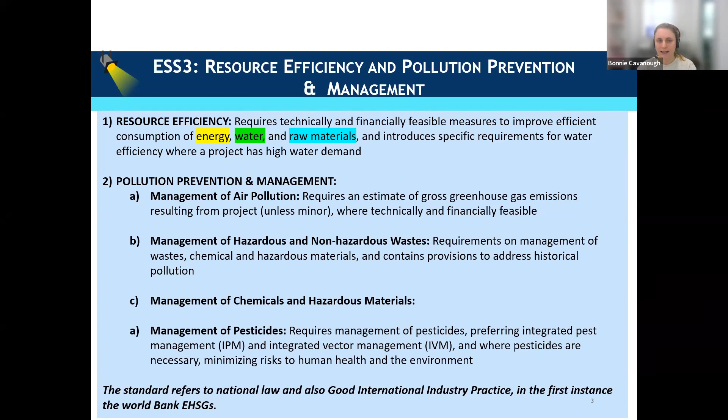I'll go through how you do that in the next section, broken down into resource efficiency - in terms of energy, water, and raw materials - management of air pollution, management of wastes, management of chemicals, and management of pesticides if applicable. ESS3 refers to both national law, good international industry practice, and the World Bank Environmental Health and Safety Guidelines, so there are guiding documents behind our Environmental and Social Framework.

So I'll move on now to the first aspect, which is energy use. This applies to facilities or projects that will consume energy, which many of our projects will do in a limited way. Many projects in the Pacific are quite small, so it might be that your project is funding a new office building. When thinking about building something new, like an office building or whatever your project involves, you should be thinking about how to minimize energy use and maximize resource efficiency.

There's guidance in the World Bank EHS guidelines, and benchmarks provided by industry associations and international organizations. But in a practical sense, think about the scale of your project and what you could possibly do to improve energy efficiency, whether that's installing energy efficient light bulbs, or including solar panels on a rooftop. The World Bank Environmental and Social Framework is meant to be scalable to the level of your project, so when working on smaller projects, think about what is financially feasible and practical, and do whatever you can, but scale it to your project.

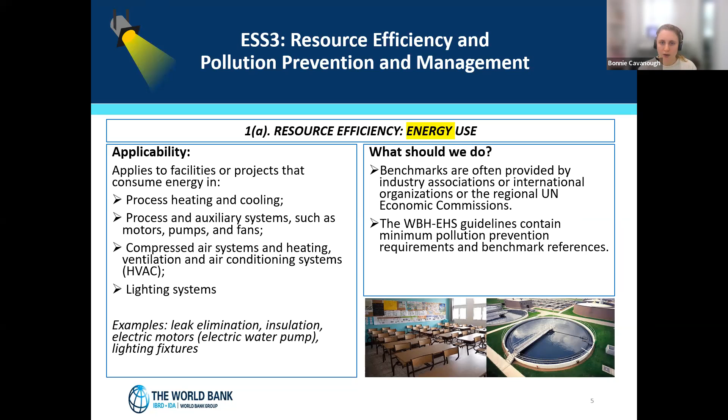I'll move on now to water use. For projects with significant use of water, there is a requirement to assess potential cumulative impacts of water use upon communities, other users, and the environment.

That means if you're working on the preparation of a project where you'll be using a lot of water, for example an agricultural project where you'll be installing irrigation systems, you need to consider the impact of that water use upon the community during your environmental assessment, and identify what is a sustainable amount of water to be using. You also need to consider whether your project will have an impact on water quality, and in a practical sense minimize those impacts by reducing runoff, controlling pollutant sources, and potentially treating contaminated water before it's discharged off site.

One practical example is a project we're funding under ESF where we're building slaughter blocks, or abattoirs. During preparation, we've had to assess the potential impacts on water quality, such as managing animal waste and the high nutrient runoff that comes from a slaughter site when hosing down blood and other material. We've had to propose how we'll manage those risks. That's really how you apply ESS3 practically — considering how you'll manage and minimize risks to water quality. There's also the opportunity to consider resource efficiency measures.

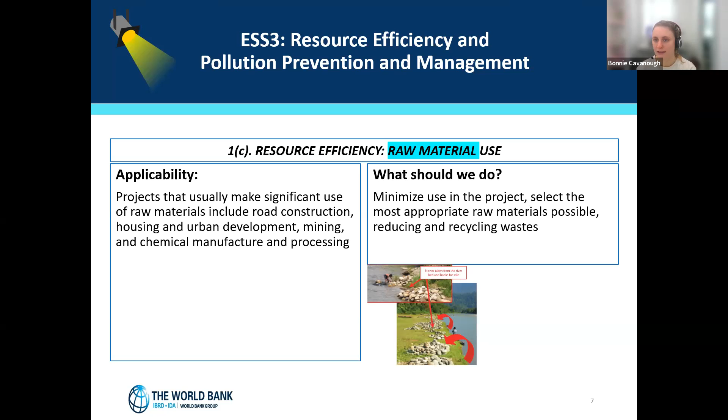Under ESS3, you are required to assess the source of the raw materials you'll be using. That means making sure you're procuring stone from a permitted quarry, from a legal source, and it's good to think about sustainable sourcing of materials. We shouldn't be sourcing sand that's been mined from beaches — that isn't a sustainable source. Where possible, we should avoid unsustainable material sources and make sure we're sourcing from legal sources, ensuring wood has been legally sourced and cut down, not from an illegal operation.

Moving on to air pollution.

Consider this one really for our projects. The applicability is, consider when you're building new offices or facilities, consider energy efficiency, try and reduce your emissions that way - energy efficient lighting, potentially installation of renewable energy sources. Make sure you are thinking about waste management. If you're procuring materials or technology, consider how you're going to dispose of that technology at the end of its life, and also try and select materials that contain less pollutants, so lead-free paints, non-mercury bulbs, that sort of thing.

Moving on now, there is a requirement under Environmental and Social Standard 3 to estimate greenhouse gas emissions for your project at the preparation stage. So ESS 3 does ask you to estimate how much GHG your project will emit over its lifetime. Now, there are some exceptions, and in many cases in the Pacific, we don't need to complete this estimation. So if you're working on a project that will have diverse and small sources of emissions, for example any kind of community-driven infrastructure project with small grants going to various communities doing small things, you won't necessarily need to estimate the greenhouse gas emissions. Or if you're doing a project where emissions are unlikely to be significant, for example social development projects, child nutrition, education projects, there won't be a requirement to estimate your emissions. It also allows that you only need to do this where it is technically and financially feasible.

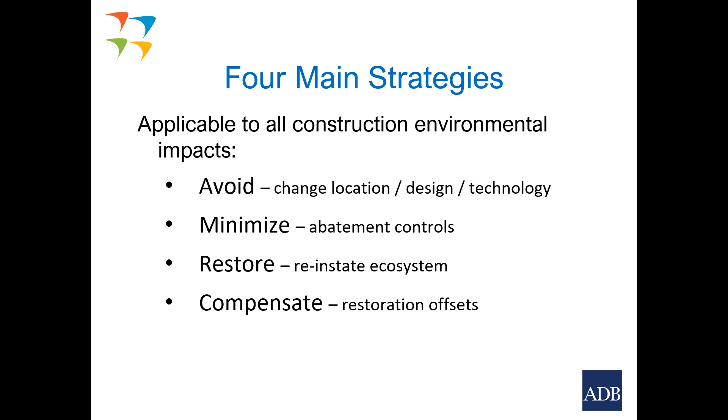And then finally, if you can't restore, then there's compensation. This particularly refers to any loss of biodiversity, ecological impacts, and also pollution and waste. These are the four key strategies that make up the mitigation hierarchy. Firstly, avoid, if you can, that's the best way to mitigate. Minimize. If you can't minimize, then restore, and certainly compensation also.

So now looking at water pollution, what are some of the sources? Surface and groundwater can be impacted by hydrocarbons, pollution from fuels and lubricating oils used in construction projects, silt from normal excavation, and cement from concrete batching plants, which can raise the pH of water and be dangerous to surface water quality. Sewage from construction camps is another source of water pollution. Polluted groundwater discharge can happen when pollution goes through the soil into the groundwater, causing pollution of water bodies a distance away from where construction is ongoing. Chemicals used during construction are another source of pollution, and as mentioned before, invasive species brought in from other countries can cause significant effects on biodiversity.

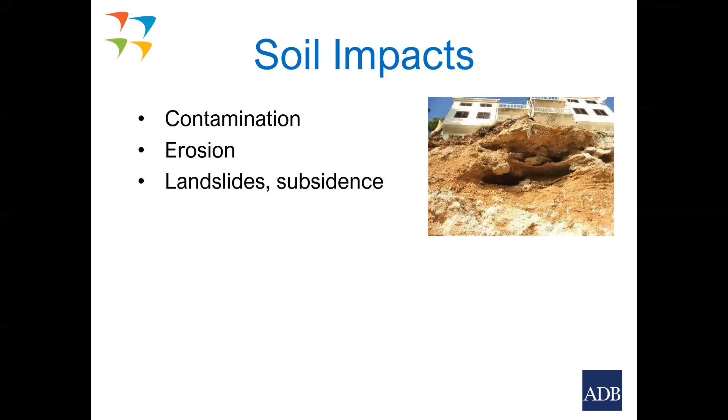Soil impacts. Soil contamination is one of the highest risks, and this can occur through chemicals and oils, or through landslides caused by construction activities, and heavy vehicle traffic on temporary construction site roads. Wherever there are steep slopes, there's a possibility of landslides due to water or overloading. These things must be considered in your environmental management plans, or your construction environmental management plans.

So it needs to be controlled - you need to make sure the contractor is controlled when these sorts of things happen, that there is control to clean that up, and again to reinstate if the community is affected through their polluted water supply. The contractor will be required to compensate by providing fresh water from somewhere else. So these are common sorts of things in construction if it's not properly mitigated and not properly controlled.

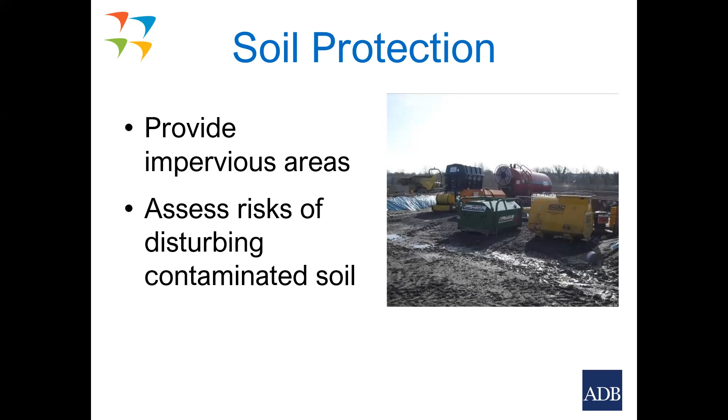Soil erosion. Exposed soil. This is a classic problem in construction. Exposed soil on a gradient has a high risk of erosion, and it can be a major problem in construction activities, resulting in the loss of fertile soil, the loss of habitats, pollution of water bodies, and landslides.

It can be minimized by the use of vegetation mats used to stabilize loose rock, check dams or gabions, which reduce the velocity and intensity of the eroding media, which in this case is water.

Here are some other measures for soil protection during construction: minimizing, preventing and reducing erosion by minimizing the length of the slopes, relocating any temporary structures that may cause issues, such as relocating a cofferdam to a better situation that will reduce sedimentation, minimizing the grade and maximizing flow resistance of any channels, and using wide channels rather than V channels to reduce the velocity.

Use armor, as you can see in the right-hand picture there, using armor reinforcements such as gabions and geotech fabric to strengthen the banks, and then conserve topsoil and vegetation, or restore the vegetation.

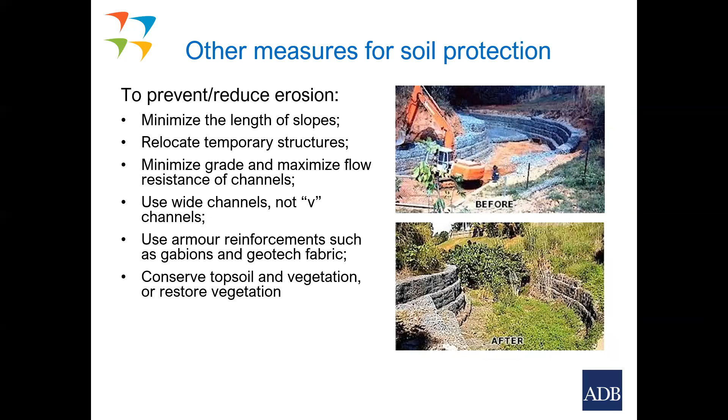You can see in the bottom picture, after those measures have been put in during the construction phase, the vegetation is allowed to grow back. By putting in those gabion measures, you've protected the banks and the surrounding environment from significant erosion that would otherwise occur if that strengthening and protection didn't happen.

As the construction proceeds, as the road proceeds, revegetate as soon as possible, have progressive stabilization of the earthworks, and most importantly, around the site, wherever there is runoff, there should be runoff channels leading to sediment retention ponds.

In the case of concrete batching, there should be chemical treatment to reduce the pH.

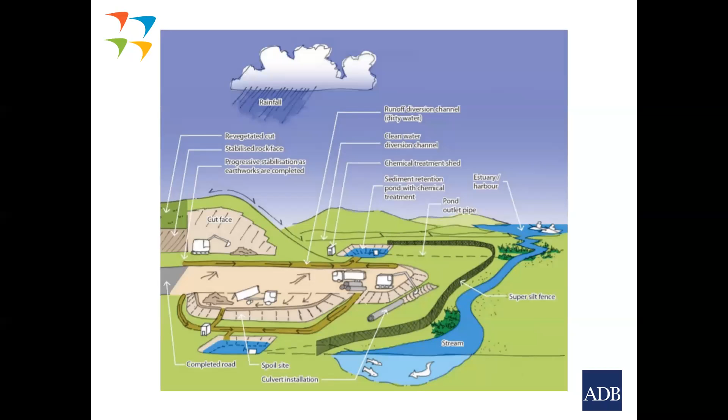We would like to see in a contractor's environmental management plan something akin to this kind of diagram, just to demonstrate exactly what measures he's got in place, that he's assessed the area, assessed the vulnerability of the area where he's building, and taken appropriate measures specific to that particular area of construction. So this is the kind of detail we would like to see in construction environmental management plans when it comes to pollution control in a construction project.

Many countries are taking a very hard line on management and disposal of construction waste, particularly hazardous waste and contaminated waste. A waste management plan, as part of a construction environmental management plan, must deal with the waste handling and disposal of all of these different waste streams.

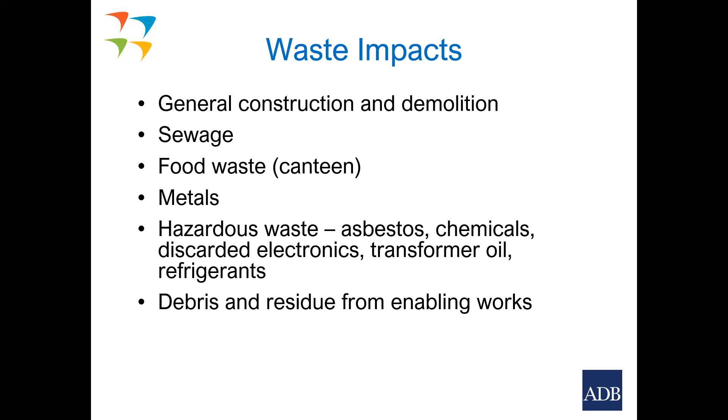The key thing about waste management is that there needs to be planning in advance, early on during the preparation of the construction environmental management plan. There needs to be detailed planning as to how these various waste streams are going to be dealt with, written very carefully in the plan. For those of us who review contractors' environmental management plans, it's very important that this management is written into their plan very specifically, so you can see just how they're going to manage their waste.

Otherwise, if they start their construction work without having an approved management plan in place, they would just do it ad hoc, and it would be a disaster. So it's very important that the contractor has thought very carefully about how he's going to deal with his various waste streams on site.

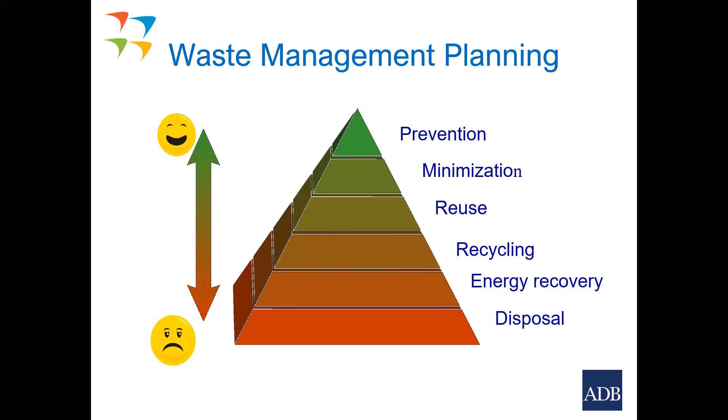So in summary, when looking at management of pollution control and waste management, the four mitigation strategies should be used to limit construction impacts: avoidance, minimization, restoration, and compensation.

Employ internationally recognized good construction practices, and all contractors should be aware of those. But we often find that contractors in the Pacific Islands think they're an easy touch, and they don't have the same stringent legal requirements that they do in more developed countries like Australia and New Zealand. The contractors know full well that they can't do this sort of thing, but when it comes to the Pacific Islands. My experience is that contractors think they can just get away with not spending money on dealing with their waste and pollution control.

Very important that they are called to account to ensure good international practices are required. Pollution control, water pollution, soil impacts, and then waste management planning, the hierarchy.

So in summary, that's just a very short practical presentation on some of the issues relating to construction management of waste construction management and pollution control. So if anybody has any questions, please fire away.

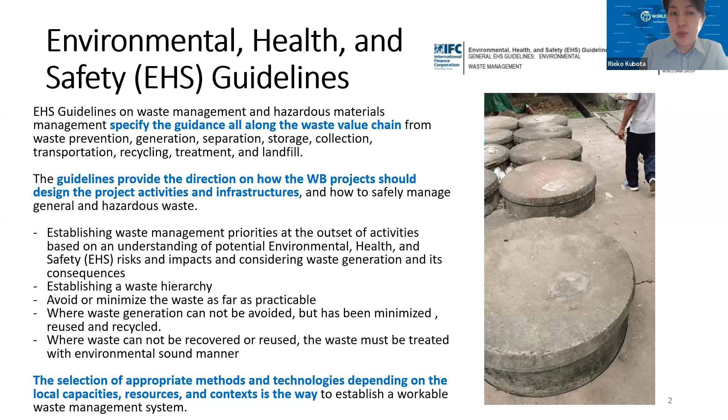Okay, so the EHS guideline touches on both general and hazardous waste, but it covers quite extensively how to treat hazardous waste in World Bank projects, just because hazardous waste has a bigger negative impact when it's not safely treated or disposed of. That's why hazardous waste is always a priority issue, and ensuring separation from non-hazardous waste is really essential when considering the waste management system in World Bank projects.

And when we consider hazardous waste management, the basic principle is that we want to prevent that hazardous waste as much as possible.

We try to understand the potential impacts and risks associated with the management of any generated hazardous waste during its complete life cycle. For example, some construction activities use a lot of paint, which is considered hazardous waste because it contains a lot of chemicals. If it's drained into water, it can pollute the groundwater as well. So we need to assess such risks during the entire life cycle of the product.

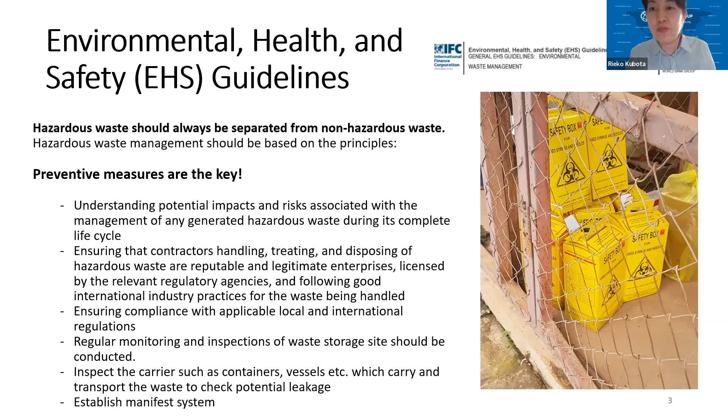Okay, Afira, before I hand over to Bradley, can I just quickly show you one case study that I've done for the project? Yes, please. Okay, let me just do this very, very quickly.

When I prepare waste management projects, in all the World Bank project steps, we follow the same process. We usually conduct a waste composition analysis to understand what kind of waste is actually generated in the areas where we are going to implement the project. This is a very standard survey that we conduct, and we identify what kind of waste we need to deal with, if there is any hazardous waste generated in the area, and so on.

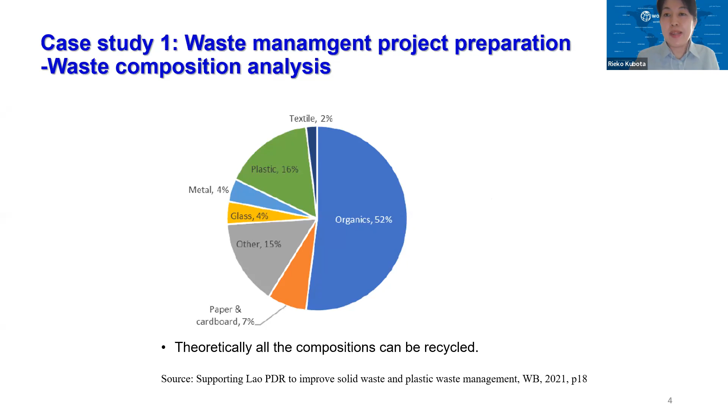In the project I worked on in Laos recently, much of the waste is organic waste - food waste, garden waste, trees and leaves, plants, and so forth. We identified very few hazardous items; it wasn't really reflected in this graph, it's under others. So we find this kind of waste composition at the very beginning.

And then we also conduct a waste stream analysis, where we identify what volume of waste we would need to deal with, and in what way it is generated. In our example, it was generated as mixed waste.

So it was not separated, it was just coming in one bag as mixed waste. So we thought it would be better to have a sorting or recycling plant, so that manually and also automatically, mechanically, we can sort out all the recyclable waste, the compost waste, and the hazardous waste at that sorting plant. We do this technical design of the sorting plant afterwards, so that we can minimize the waste that goes into the landfill and try to accord with the waste hierarchy.

So what we are really trying to do in a technical design of the waste management project is minimize the waste that goes into the landfill, and maximize the waste that goes into that recycling process that will eventually be sold to those recyclers or informal waste pickers.

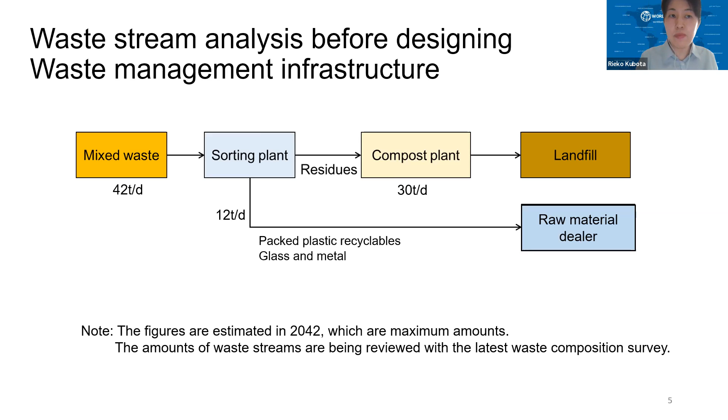So this is just a typical design of the sorting center. After accepting the waste at the recycling center, we go through all these different mechanical processes so that it can be sorted out and brought into the recycling process once again, for material recycling or energy recovery and so on. This is the kind of technical design we usually do for the waste management project.

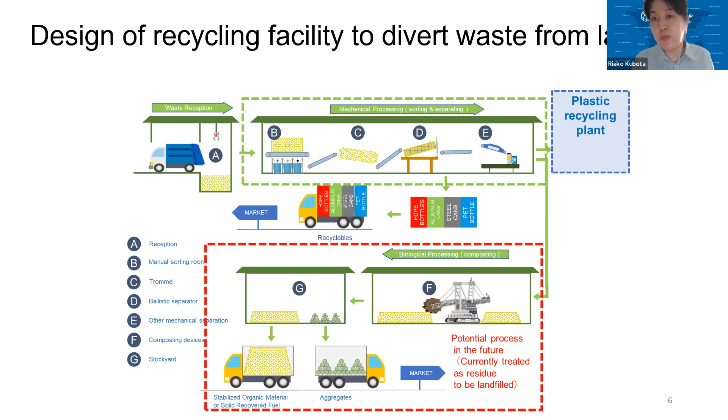And for all the residual waste that arises from this process, we need to design an environmentally sound landfill site. So we do have different technical designs to make sure we don't pollute the soil, groundwater, surface water, and also the surrounding agricultural lands.

This is something we collaborate on very strongly with the ESF team, who is much more familiar with the ESS 3 standard and other standards prepared by the World Bank and other international standards. We also try our best to relocate existing waste, which is usually open dump, but try to safely manage and close those open dumps so that we can make new landfill sites that dispose of waste in a much safer manner.

We also usually attach a leachate treatment facility. Leachate is the wastewater coming out from the waste, usually seeping out from the bottom of the landfill, and it's quite hazardous because it's concentrated wastewater coming from all the types of waste put inside that landfill. This is again required in the EHS guideline, to have a proper wastewater management system at the landfill site.

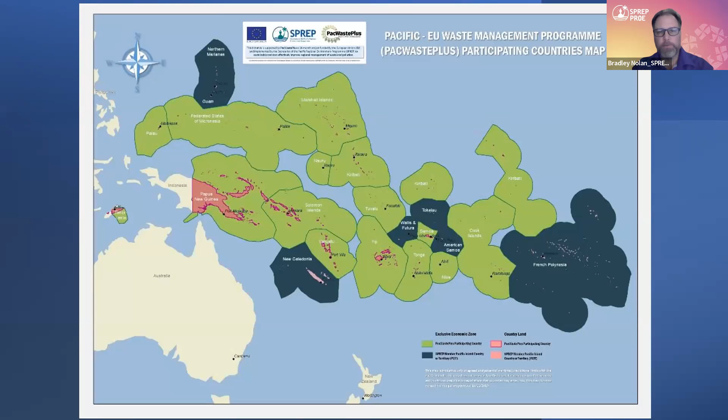For those unfamiliar with myself and the work of PacWastePlus, we're a European Union funded project across 14 countries in the Pacific and Timor-Leste. We're implementing projects looking at hazardous waste, asbestos, e-waste, healthcare and solid waste across those areas you can see, and a bit of wastewater through our partnership with SPC. We've got 4 key result areas: data and information education, legislative assistance and frameworks, on-ground activities and best practice implementation of works, and capacity building. So covering the whole gamut of project activities that can occur throughout the entire Pacific. You'll see, far to the left, Timor-Leste also included, even though they're sitting outside of the Pacific Ocean.

The reality is the work we've heard Bonnie, Alan and Rieko talk about is the core ESS considerations for waste management work. The focus on what am I about to do, what waste am I about to create, and is there a way to reduce, avoid, and mitigate any of those responses, is vitally important in any activity we do. We really want to make sure that not only direct but perverse impacts from project activities are dealt with.

I know this is a World Bank presentation, but I thought it might be useful to quickly reflect on the ESS process thinking that SPREP implements for all of its projects, regardless of thematic area, whether waste, climate, or oceans, islands and ecosystems, with the intent of recognising that there may well be other impacts to waste-based work that might influence decisions that need to be made.

So the typical assessment process looking at consequence and likelihood is applied across our ESS assessments. When we look at our assessments, we consider both principles and safeguards: human rights, gender equality, child protection, climate change impacts, biodiversity impacts, and waste management principles are all considered.

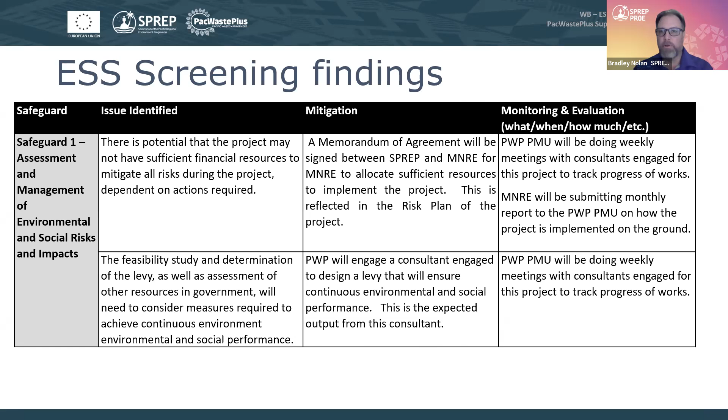So there's complex thinking that needs to go into these systems past just, are we producing waste, are we capturing it, are we minimizing it? We need to make sure the system and intervention designed actually provides the best overall outcome across everything. This presentation series is all about ESS3, but remembering the 3 indicates there's a 1 and a 2, and other considerations as well. So it's good to focus on minimizing waste management impacts, but remembering those other ESS considerations may influence a design scope change on our projects to make sure all outcomes are balanced.

Similarly, how does the refund work? Where can people go? What are the health and safety implications on the structure of that system based on the activity undertaken? How can we ensure effective operation and monitoring? All these considerations are captured inside that screening and help build a strong, robust system so that our intervention, seeking a sustainable financed solution for this waste, also has stronger community sustainability.

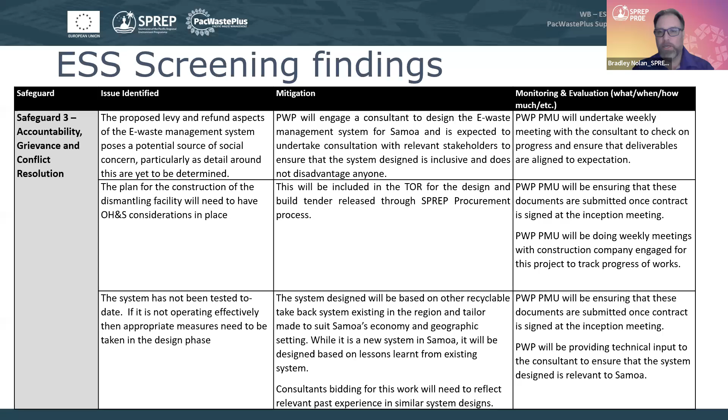So I know I've moved through that relatively quickly and only provided one example, but in the interest of time, I think that's the appropriate way to go. Back to you, Afira. I'm happy to answer questions or have the floor consider all the presenters together in a broader scope. Thanks.